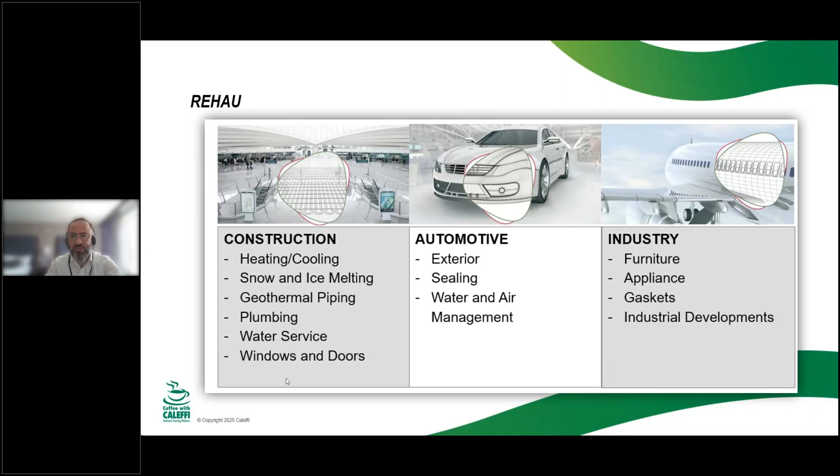But specifically today, we're going to talk about radiant systems and balancing. What is radiant technology? In the HVAC world, any system that provides more than 50% of the heat transfer to the room and the occupants through longwave radiation, we can define as radiant technology.

In our world, it's normally a network of pipe, which is either embedded in the floor, wall, or the ceiling. Based on my experience over the last 12 years, over 90% of the systems we work with are floor radiant systems, mostly radiant heating, or it could be radiant cooling as well.

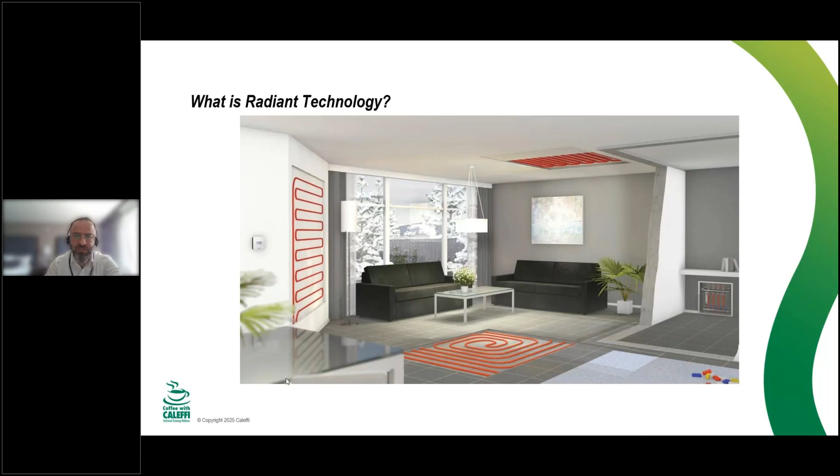The concept of radiant heating is we are sending warm water through a network of pipe, which is mostly embedded in the floor. There is a conduction heat transfer where the floor gets warm. This is very important - we are talking about a low temp system.

When it comes to the design consideration section we're going to talk about it, but the advantage of this system is we are talking about 100 to 120 degrees max supply water temperature. So this is considered a low temp and very efficient system.

By warming up that floor surface temperature to the point that it starts radiating towards the objects and surfaces in the room, based on Stefan-Boltzmann theory, any warmer object tends to radiate towards colder surfaces - that's the fact we take advantage of. Of course, some natural convection happens at the floor level, I'd say about 20 to 30%, but the majority of heat transfer to the other components in the room, or even occupants, happens through longwave radiation.

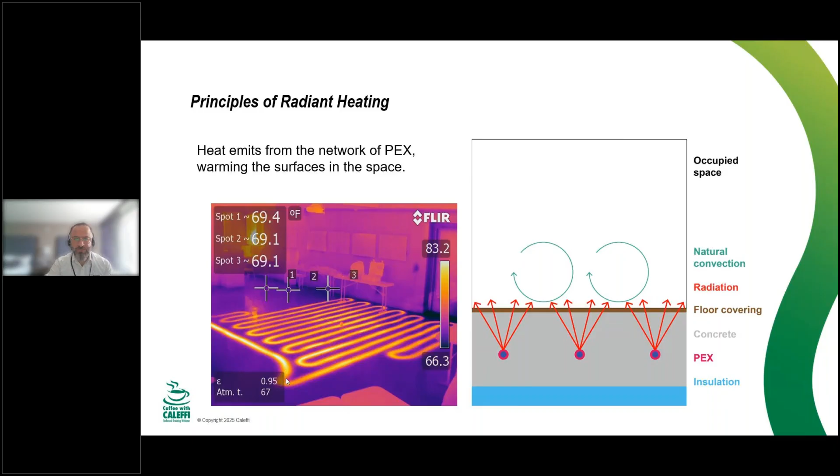The types of these radiant systems - we mostly see embedded surface systems, or ESS, where it's a unidirectional type of heat transfer. On one side of the slab, it's mostly insulated, so the heat transfer happens on only one side of it. This is, again, more than 90% of what we see in the industry.

We also have thermally activated building services or systems, aka TABS system. These are bidirectional, so you will see heat transfer on either side of the slab. The slab is exposed, so it will act as a floor system on one level, and it will act as a ceiling system on another level. We have some project samples on this on our website if you want to check it out at REHAU North America - very successful projects. It's a little bit complicated on the design side, but we can definitely help with that.

Also, we have the high performance ceiling panels. These are panels made from metal, and you have your tubing attached from the backside. Very common in Europe, it's in the baby steps in the North American market. But since it's out of our scope, we're going to be focused on the first system, that is ESS.

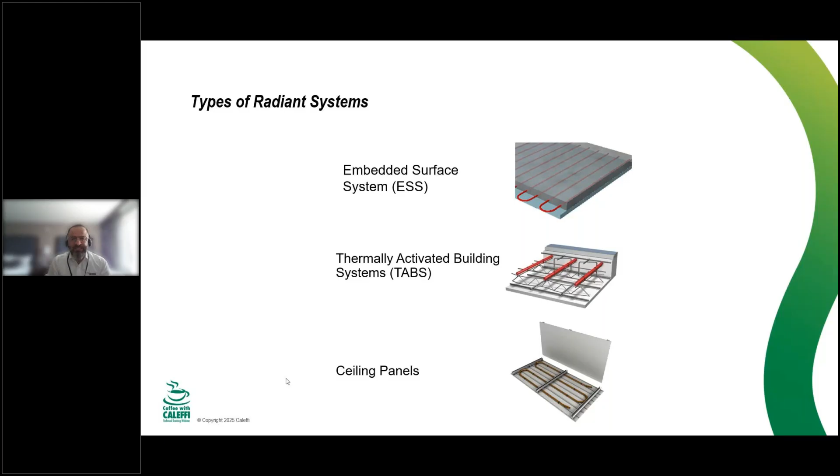This is where the contractors come and pour concrete, normally anywhere from 3 inch to 6, 7 inch, and we want to see at least 2 inches of concrete coverage in these systems over tubing to keep the integrity of the thermal mass. So for a structural slab, 2 inch above tubing is your magic number.

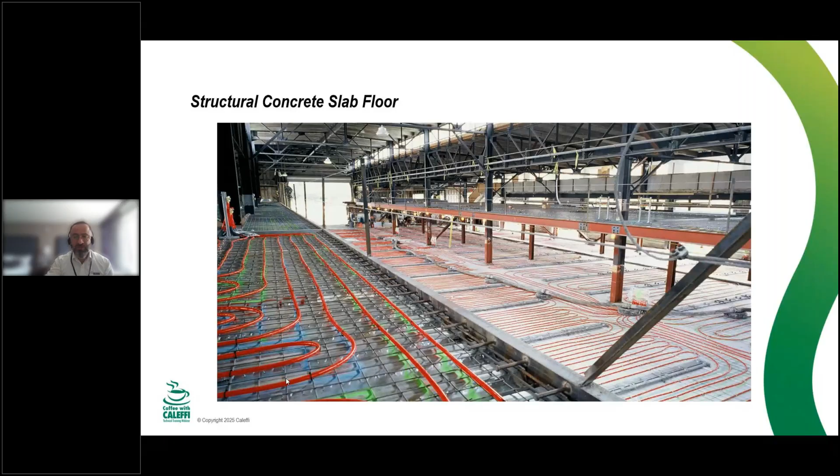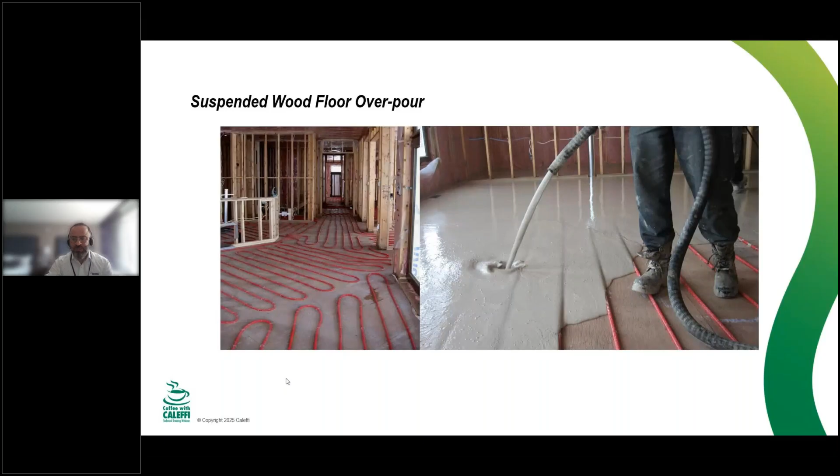Also, we have another wet system. This is also for a new build, which is called an overpour system. This is normally for like 4-story walk-ups or wood frame buildings, where you staple down your tubing over your plywood subfloor, and then you come and pour a 1.5 inch layer of concrete or gypcrete. In these cases, since these systems are non-structural, all you need is only 3/4 of an inch of gypcrete or concrete coverage above your tubing system.

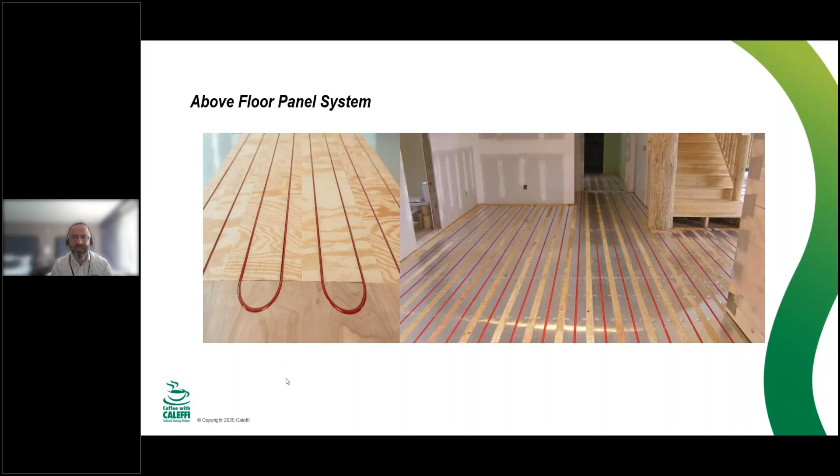Also, we have dry systems or panel systems. These are perfect for retrofit application. In the photo, you can see our RAUPANEL and RAUBOARD system, a great application developed by the REHAU engineering team. The photo on the right has the highest BTU output of any other panel system in the market. If you do 6 inches on center, you can get almost 30 BTUs per square foot using only 110 degrees supply water temperature.

This system can also be installed on the wall if by any reason you are short in floor space. Like for example, in some bathrooms, if they have multiple exterior walls and you're short on area because you have your bathtub and toilet and everything, you can use a portion of a wall using one of these radiant panels to provide more heat to the space.

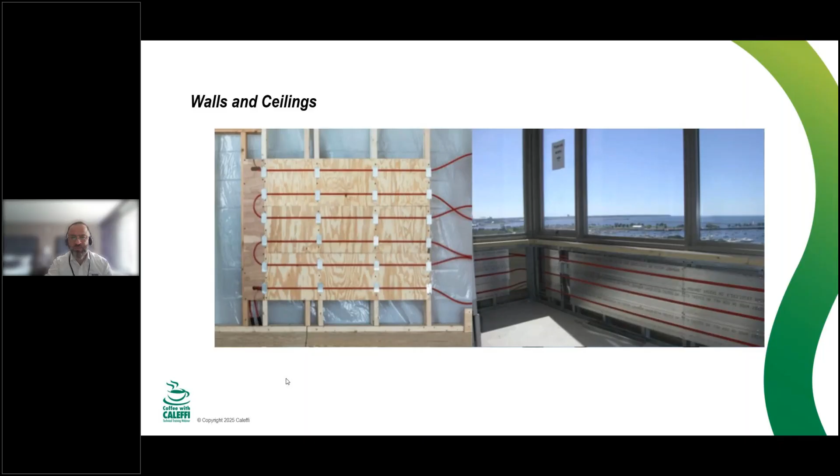So let me ask a question from all the audience here before we go to the design. Has anyone in this room designed or installed this system before? I think Max can have access to the answers.

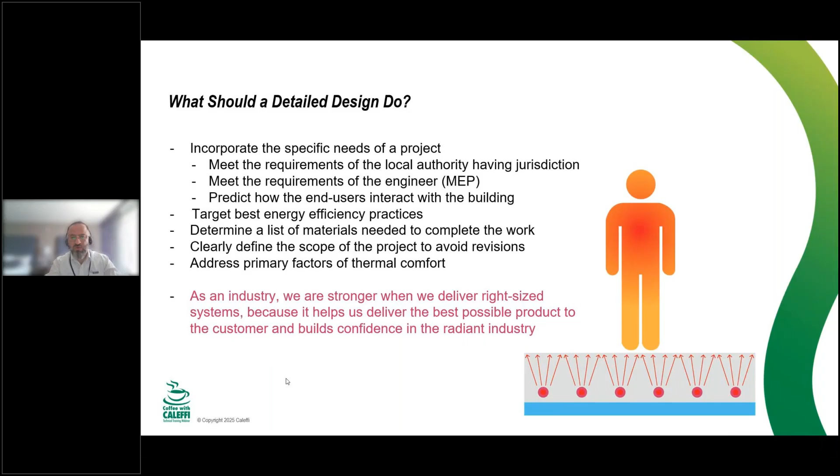That's actually a hydronic designer's job, to make sure you select the right system, sometimes by even upsizing a bit on the plastic pipe and saving a lot on the costly part of the system. So we would be more than happy to help you with that.

These steps that I'm going to talk about, we have a software for it. It's called LoopCAD, developed by a Canadian company called Avenir. It's a very nice application which does radiant heating, radiant cooling, and snow melt, and it has these formulas built into it. But I want to explain the fundamentals so you know what's happening. If anyone in the room has dealt with this app before and has questions, I'd be more than happy to discuss it.

Or if someone prefers doing a manual calculation, always, that would be fun too. So these are the steps. First of all, you need to do the heat loss of the space.

If it's a commercial project, in most cases you'll get the number from the engineer. The mechanical consultant team works on these numbers, and they size their heat source, which could be an electric boiler, gas-fired boiler, modcon boiler, or any type of heat source. That's the basis for the heat loss calculation.

And then on the radiant panel side, where you have it in the room, you want to define the unit heat load, which is technically the usable area. Then we calculate the floor temperature, the pipe size, the spacing. We have some best practices I'm going to go through. Then by knowing the water temperature, the flow rates, and the head losses, we get to the final steps, which is sizing the circulator, the expansion tank, and other components of the mechanical room.

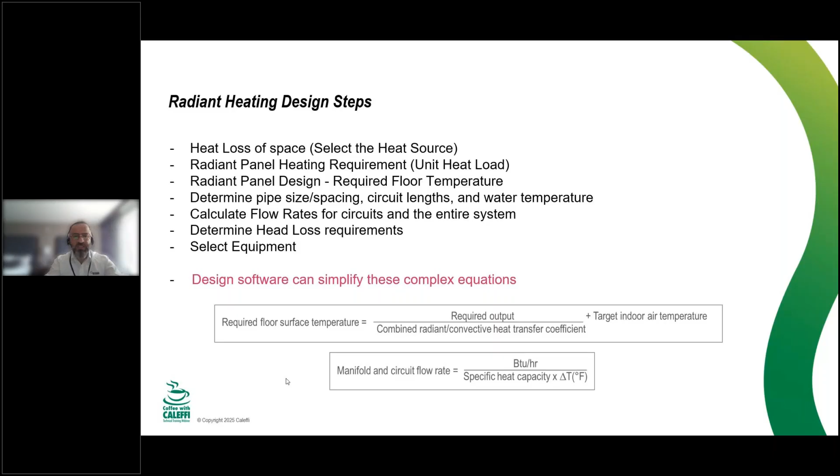These formulas, you can see in the next slide, are the three main ones I'm going to talk about. The first is the required floor temperature, which equals the radiant unit output divided by the heat transfer coefficient, plus the indoor design set point. The indoor design set point, normally for a radiant system, is based on ASHRAE 55 — somewhere between 68 and 72 degrees Fahrenheit.

In some areas we may get questions from mechanical engineers or owners wanting higher numbers. This is a different system than forced air — you don't want a higher indoor design set point because your surfaces are already warmer. That's based on various research that ASHRAE and other organizations like CBE did; they figured out 68 to 72 would be a good number.

Also, the heat transfer coefficient plays a very important role, because in heating mode you're taking advantage of natural heat transfer through convection, so you have a higher number. It's totally opposite for cooling. When you have a radiant heating system in the floor, your heat transfer coefficient is somewhere around 2, as opposed to if it's in the ceiling in heating mode.

Let me bring up an example. Imagine we have a 1,000 square foot project, and we calculated the heat loss as 30,000 BTU per hour. If you divide this by that number, it gives you 30 BTUs per hour per square foot, which is your unit load. Divide this by almost 2 as your heat transfer coefficient and add it to 70 degrees indoor design set point, and it gives you the floor temperature. If you get to a floor temperature of 85, it means you can compensate that heat loss.

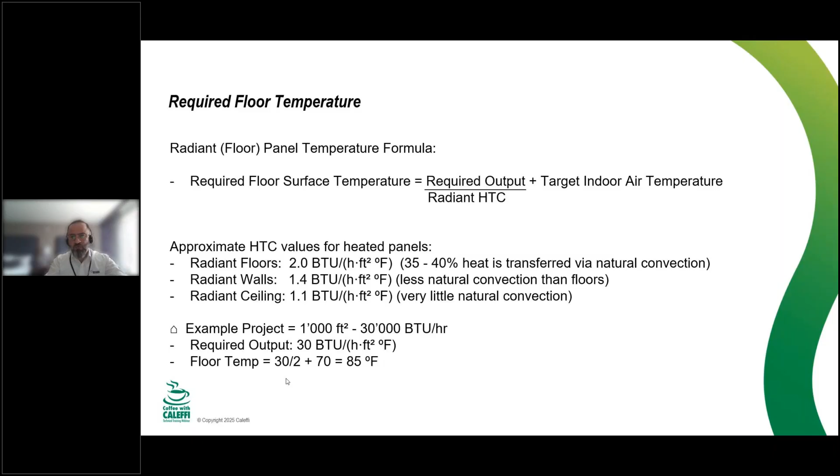So what's next? What water temperature do we need to bring the floor to that temperature, 85? That's calculated through this formula, which is a factor of the total R value above the tubing, like the concrete and floor covering, also the pipe spacing. As a rule of thumb, it would be somewhere between 1 to 1.5, and then you add it to the floor temperature.

In our example, if we want to consider something in between, you have 30 BTUs per hour per square foot. You multiply it by 1.3 and add it to the floor temperature of 85, you'll need somewhere between 124 to 125 degrees supply water temperature to make sure you're getting to that 85 degree floor temperature and then compensate the whole heat loss of the space.

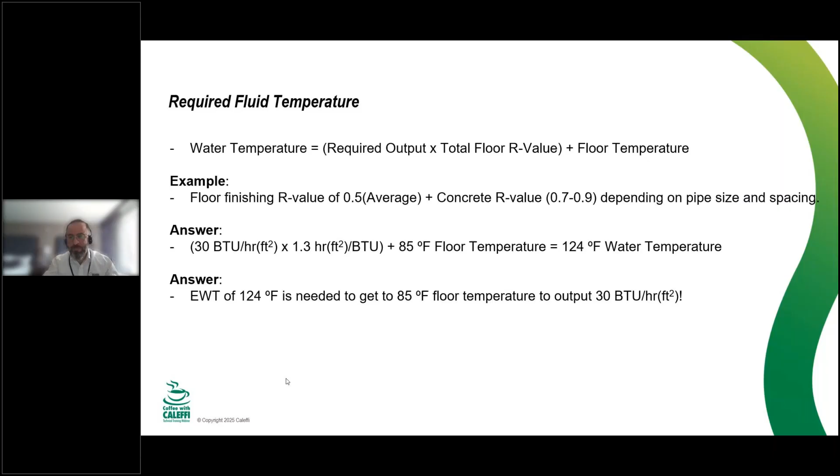Last but not least, the main formulas. This is the very famous hydronic formula to calculate the flow rate. You just divide the BTU per hour, or your heat load, by fluid density times 60 to convert the hour, and then the specific heat of the fluid, which for water you can round up. The regular delta T in the hydronic industry, especially radiant, is 20 degrees. So to make it easier to understand, I rounded up the whole denominator to 10,000. Your magic number is whatever BTU you have for your building, you just divide it by 10,000 if you're using 100% water.

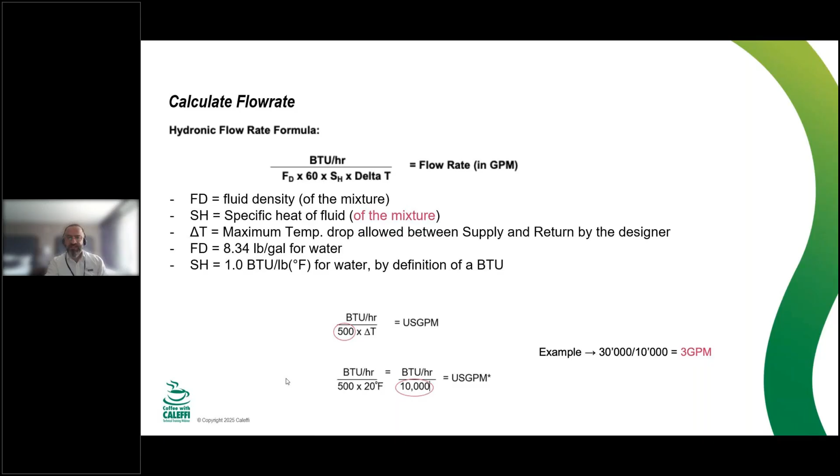Then you can tell how much GPM you need for the entire building. In our example, where we had 30,000 BTUs, you will need 3 GPM to send to the room to make sure you can address the heat loss. And then your next step is where you run your tubing to each room.

Radiant systems are very nice and zonable. Manifolds normally come from 1 station to 12 stations, which means you can serve rooms up to 12 rooms at the same time and control it.

Keep in mind, using the ProBalance manifolds, REHAU ProBalance manifold, you are able to adjust this loop GPM from 0 to 2. As an example, you can see in the photo, you have 2 rooms, similar square footage, but one has 2 exterior walls, meaning it has a higher heat loss. No problem, even if they have very similar loop length, you can just adjust it on the manifold and send 1 GPM to room A and 0.5 GPM to room B, and take care of the balancing very easily. Max is going to talk about it more.

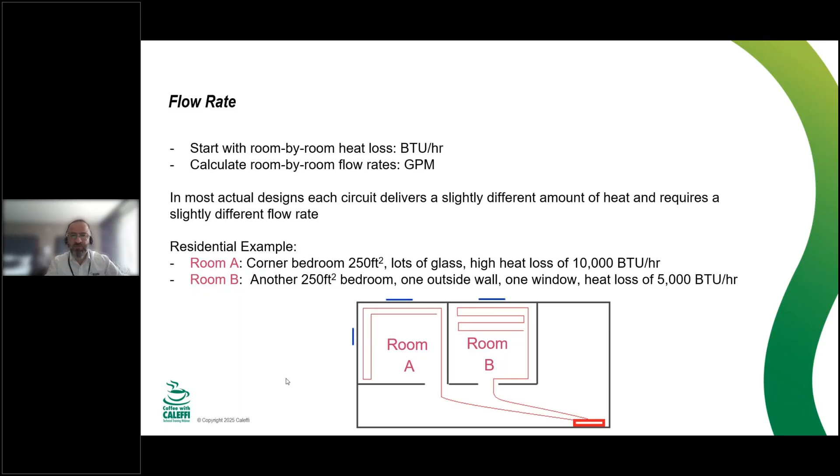After having the GPM, the next step would be calculating your head loss. There are several tools, as I said. LoopCAD does it as the first, easiest way for our team, the hydronic designers, or you can have access to an online head loss calculator.

You just enter your pipe size, your flow rate which we calculated in the previous slide, the fluid type, and the length of the pipe. Then fluid temperature plays a very important role. Then you can see how much pressure drop you're experiencing through your loop.

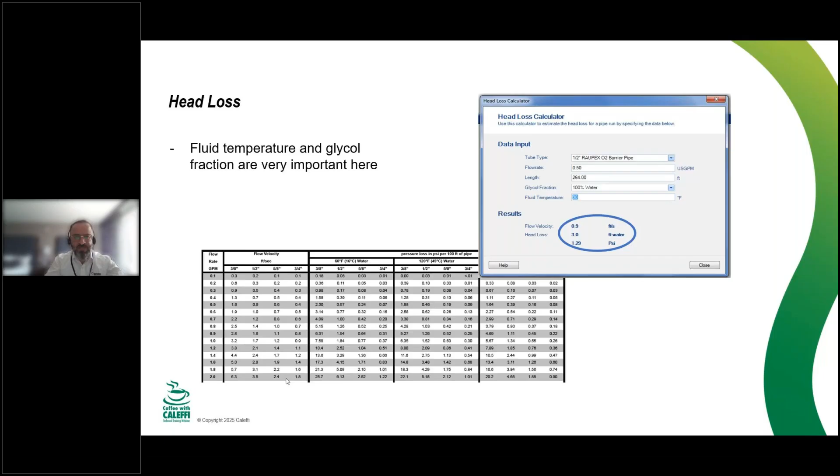Once you have the pressure drop and the GPM, that's your next step to go and size your pump. Depending on your pump manufacturer, you can always refer to their graphs. You can find that best efficient point of the pump, which is the side of the curve where your pump will operate at its maximum efficiency, and then pick it very easily.

I think this is from, they can find more information on idronics 16, right Max? Yeah, so this was a journal that we did on circulators. This goes back to 2015 when we published this. There's a lot more ECM technology now, but the concepts are the same.

You still want to find what that operating point is going to be to select a pump. I would say it's easier with ECM pumps because you have to be in a range. You're not going to end up at a specific point, and they can operate really efficiently within a larger area, which is helpful, but you still have to do the math. You still need to find the circulator with the calculations that Saeed described in the last couple slides. One really important thing is knowing the percentage of glycol, because that can really affect the whole equation.

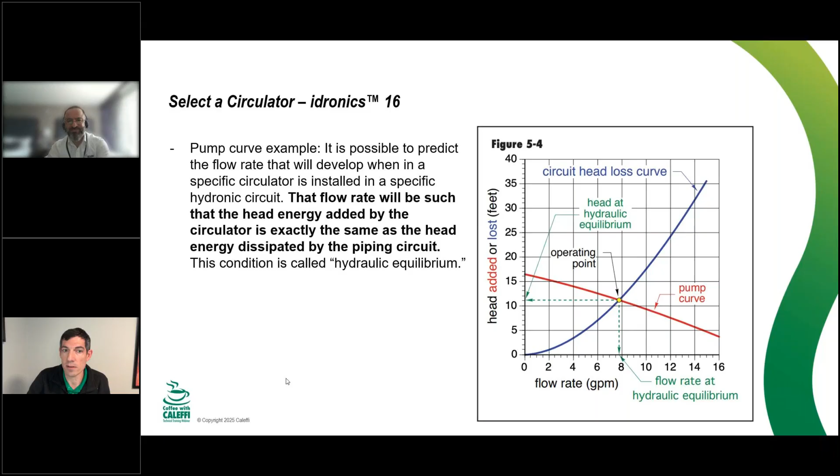Everything that you're putting into LoopCAD, if it turns out that it's not water, it's 50% glycol, you may have to relook at a couple different things there, specifically the pump sizing. So on the next slide, we'll talk a little bit about balancing options. What we wanted to do here is put together this building.

So I think zone 8 is a yoga room, so that might need a completely different temperature consideration than what we're doing in the walk-in freezer. In some cases, radiant is just used to keep the frost from ruining the concrete—that's completely different than what you'd be doing in a yoga room where people are already moving around and pretty warm. So we're going to need different flow rates for all of those potentially. That's one thing we have to look at.

So how would you—this is a question for anybody to write into the chat—how do you balance this building? We've got 9 zones that are pretty different. Can you use the same balancing valve here, or what's your strategy?

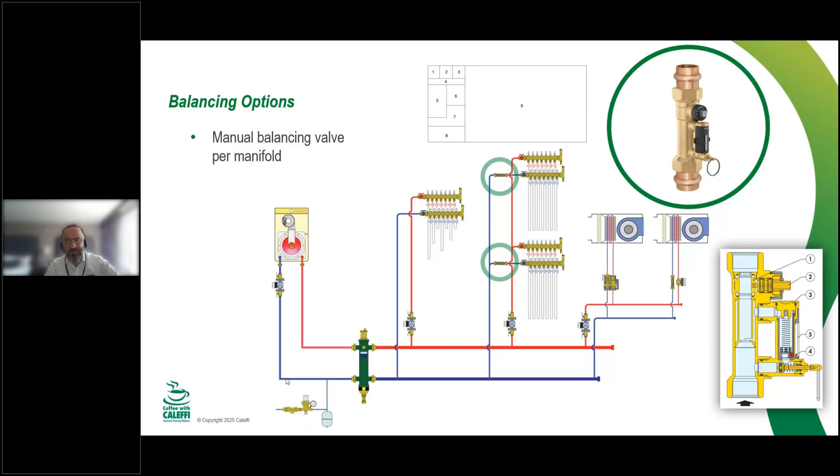Before we continue with the design considerations, here are some rules of thumb and best practices I'm going to mention. Of course, project by project, depending on the owner's needs and the mechanical consultant's needs, this can vary.

As I mentioned in the previous slides, we get a lot of questions about the comfort range. There are two ways to look at it. First, based on ASHRAE 55, which specifically addresses human comfort in buildings, they defined 6 primary factors for thermal comfort: metabolic rate, clothing insulation, air temperature inside the room, air speed on your skin, humidity of the air, and radiant temperature.

We talked about this - the radiant temperature is provided through longwave radiation. That's why having a radiant system in your application can help a lot for you to feel comfortable. If you want to address this with a radiant system, you want to make sure you follow the ranges that ASHRAE 55 recommends.

We also work with CBE, and I mentioned their name in part of my presentation. CBE, the Center for Built Environment, is a group of PhD and master's students out of University of California Berkeley, and they are focused on the highest level of research and studies on HVAC systems, especially ones dealing with high performance buildings and human comfort.

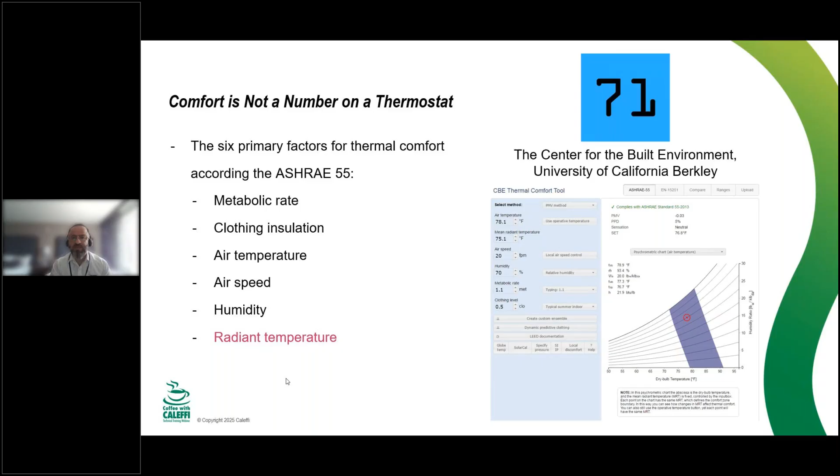They also have a nice tool called the RAD tool. It's a phase-one deliverable, let's say, radiant heating and cooling calculation. If we had a chance to talk further about radiant cooling systems, I'll definitely mention that RAD tool. Please go and check it out - CBE RAD tool.

But here are some rules of thumb, as mentioned, that I'm going to cover. When you're thinking of your slab configuration, first you need a layer of insulation where your tubing is either stapled to it, or on some projects they add a mesh layer and fasten the tubing to it. For this insulation layer, we always ask you to check with the local jurisdiction for the minimum requirement. But as a rule of thumb, we normally say R10 for a slab on grade, or it should be 5 times more than whatever you have above the tubing.

So let's say you have almost R 1.5 above your tubing, considering the concrete and floor finishing. We recommend having 5 times more insulation underneath, like R 7.5 at least, to make sure you're redirecting at least 80% of the heat towards the surface above, and only maybe up to 20% gets wasted as backloss. So it's very important to have that insulation.

I get this question a lot working with our clients - do we need insulation? The higher your insulation is, the more efficiently your system works, with less waste of energy, and a faster response of your radiant application.

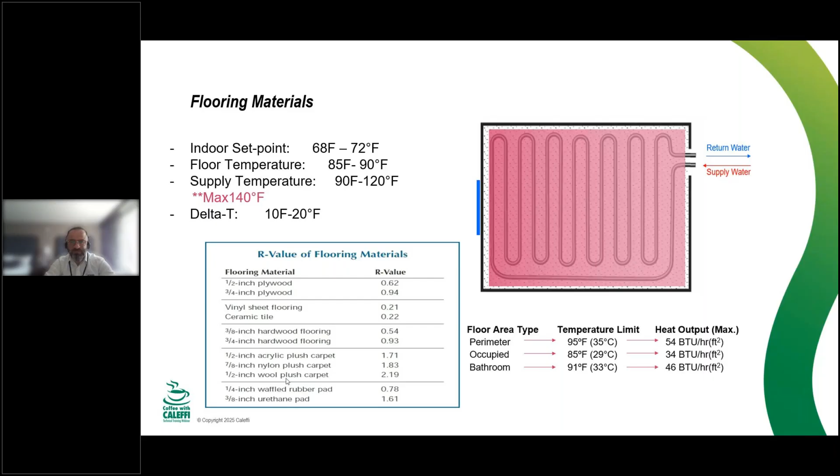And then we have a bunch of these questions. I'm wondering, Saeed, if you want to go back to the slide with our basic office and warehouse, this might be a good way to walk through a couple. So let's say one of the questions is about slab insulation. One of the things I know is important, can you model with LoopCAD or a design software if somebody said, well, I don't know if we need side insulation on the side of the slab here. What kind of difference could that make, to have insulation on the side of a slab versus just on the bottom?

For sure, you can model it with LoopCAD. And if you are not forcing the BTU, meaning you're letting LoopCAD do the heat loss calculation, the item it considers is always insulation, either in the wall or in the slab or in the edges, and that will have an impact on your back losses or directional losses. You can tweak that number and apply different R values and see the impact on your GPM. So if there is no R value on the side of the slab or even at the bottom, you will end up in a higher GPM to compensate for that. But if you go with good R values for those sides, you will end up in a lower GPM and reasonable head losses.

And you had a good question, or a good answer, for wood. So if you wanted to do hardwood floors somewhere, sometimes the underlying issue is that you could warp the floors, or you might start to smell the glue if you had 160 degree water going through them.

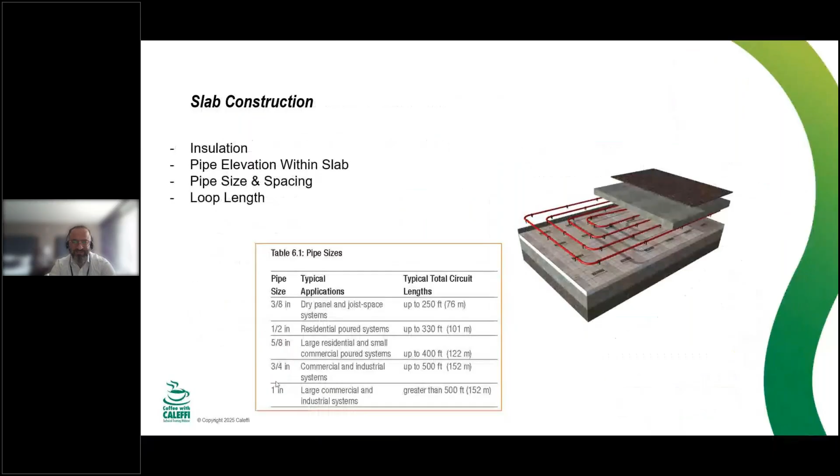But maybe in this example, let's go back to -- oh sorry, I asked you a question there. Okay, yeah, just wanted to go through the different R values of the floor, but you brought up a very good topic.

I would say hardwood floor finishing manufacturers are very sensitive about that. Some of them already have indicators -- you probably know this better than me -- that they put underneath the wood. If warranty claims come up, they rip the wood out and check that indicator. It changes color: for example, if it was originally blue and now turned red, it tells you the floor was exposed to higher temperatures than like 85 degrees, and your warranty would be void. That's why I emphasize having a floor surface temperature sensor, which you can hook up to your thermostat to set as a higher limit of floor temperature. If you have engineered wood or any floor finishing you want to keep safe, you can define that higher temperature limit on your floor and stay safe always.

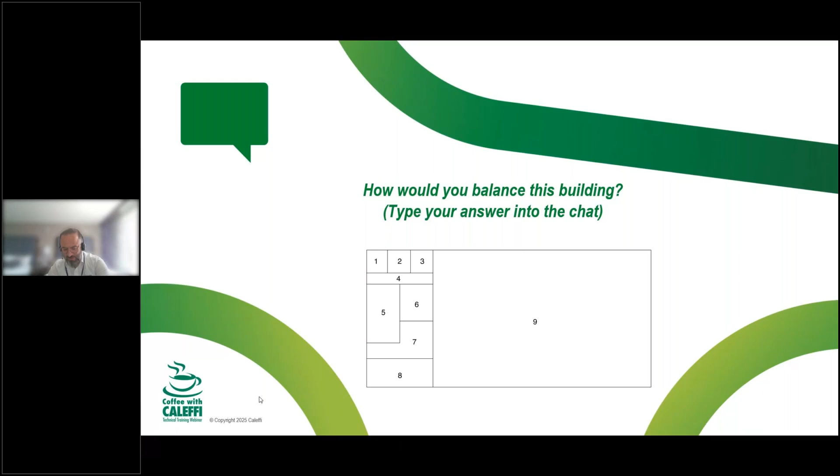And that was a question we had too -- how do you control these things? Your answer there was about wanting to know the air temperature of the space, but also the temperature of the slab. Do you want to cover where to put the floor sensor? That's always a really frequent question. Do you want to put it right next to the pipe, or where would you put a floor sensor if you had 12-inch on-center spacing, as an example?

That's a great question again, Max. First of all, we always recommend having this floor sensor inside a conduit, like a piece of PEX pipe even, because you can change it in the future if something happens. Then always place it in between the supply and return tubing -- if you're having 12-inch spacing, try to be at that very center line so it has a more accurate reading. That's the whole idea: don't be so close to the exterior unless you want to address the worst case scenario.

But you're right, picking a good spot for a floor sensor is very important. Most floor sensors in the market come with a certain amount of wiring, 6 to 10 feet. You can always add to this, but keep in mind, going with longer wires brings your reading accuracy down. So always keep that optimum distance from your thermostat.

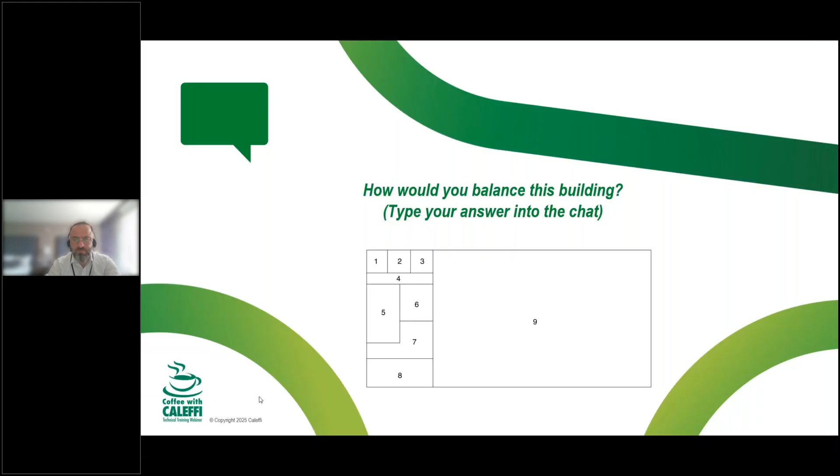And maybe we can talk about this in this building. So let's say we've got all these different types of rooms - was that one slide before that showed what they were? These, yeah. So let's say zone 9, that big warehouse, maybe as you mentioned, you go with 3/4 inch pipe and you've got wider spacing.

That's not going to react very quickly, and that's okay. You wouldn't turn on that slab at 6 in the morning and turn it off at 5 p.m. You're going to put that in cruise control, and you probably want that warehouse to be warm throughout the heating season. But that might be completely different from circuit number 8, that yoga room.

So what would you do if you wanted to do radiant in that zone still, but you wanted a little bit faster reaction time? Maybe you could put a little bit of a schedule, not 10 degrees Fahrenheit or anything like that, but warm it up for a specific time in the day. What would you use as a radiant installation method for something that you wanted a quicker response time?

That's a very good question. Again, for high thermal mass buildings, you don't have much of an option. If you have 2 inch or 3 inch of concrete coverage, you have to allow, if it's doing a startup for example. But we always recommend keeping it at idle mode and using programmable thermostats.

If you are expecting the occupants to come at 8, you always pre-program it into your thermostat so your system kicks off from idle mode to whatever it is designed for an hour earlier, just to be safe, for the smaller rooms like room zone number 8.

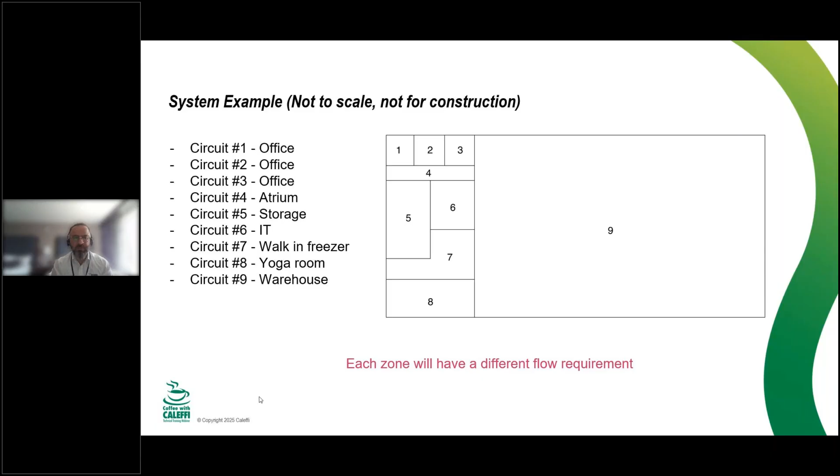That's where in many buildings you can see one bedroom is sweating hot, and the other bedroom the occupants open the window and enjoy the breeze. So if you have a good control strategy, if you consider these multiple zones, you're bringing your energy cost down. And again, our manifolds have the capacity of being controlled on each loop individually. You can have as many thermostats per building as you want, and connect it to one of those valve actuators on each loop, and make sure those zones are talking to each other, and you get proper temperature in each area.

Yeah, and I think if this building we're looking at here were a residential example, the control strategy with the floor sensor and a radiant thermostat that has a maximum floor temperature, you can also set a minimum floor temperature. So if zone six there was a bathroom, on the inside of the building with a bunch of warm zones around it, that thermostat might not call for heat very frequently, but then everybody's like, hey, why is the bathroom floor cold? That was kind of a requirement that I had for this house or whatever. You can actually set that as a minimum temperature too, so it's always going to keep the floor warm enough.

You don't want to do that in all of the zones, but that might be important in a bathroom specifically, that still works with that control strategy with the radiant thermostat. Great point, Max. I've had clients who said no matter if it's summer or winter, my grandma enjoys the warmer floor. So even in shoulder seasons or part of summer, they supply a lower, warmer water temperature to make sure they get a bit of warmth because she was sensitive to a cold surface. So setting a lower limit is always a good option too.

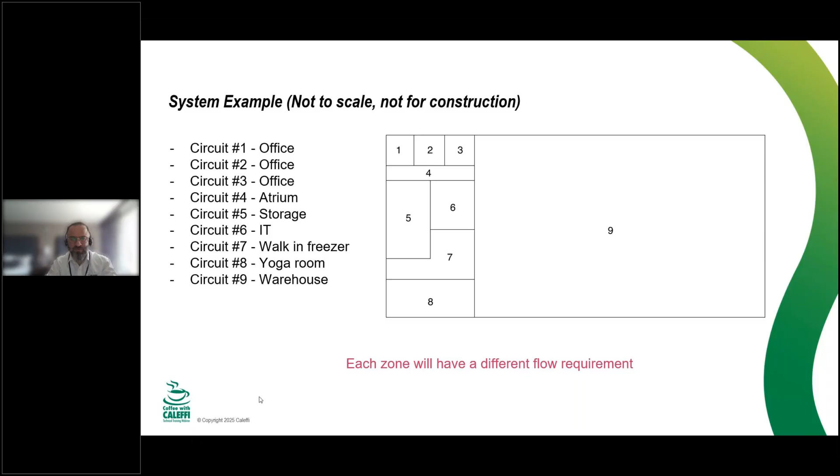And then I've got something we could try if you're up for it, Saeed, since you mentioned the radiant thermal comfort tool, the CBE calculator. If I switch over and take the screen, could you walk me through some of the parameter changes to make there? Sure, that was related to a couple questions, and I've got it pulled up here. I'm going to make myself the presenter and show the screen for people who want to stay on. We're just past the top of the hour, but I think this ties together a lot of what you've said and is definitely helpful for the design.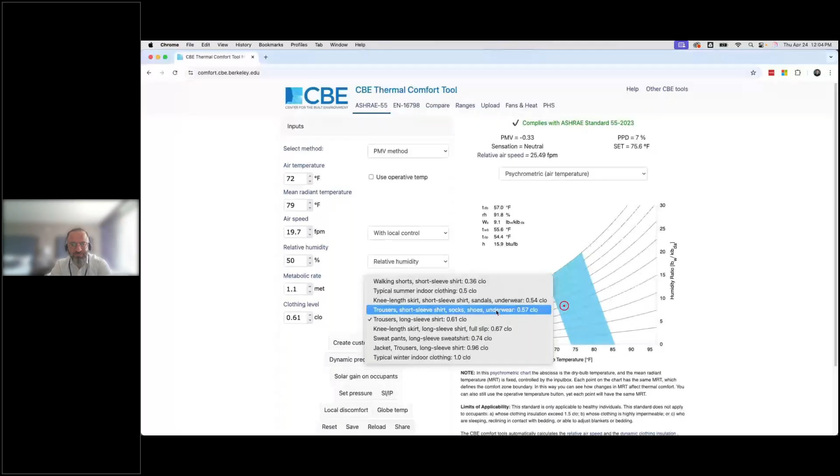Again, a lot of the calculations made for clothing level back in the earlier ASHRAE days were assuming it was just a man wearing a suit at work. If you were in a boardroom, you were going to be a man wearing a suit, and that's very much not the case anymore. So that's something you can model, that the average clothing is going to be a different variable than in that scenario where everybody was assumed to have a higher metabolic rate and be wearing a suit or something like that.

So that's just a very cool tool that I like to play around with, and it also gives you more confidence, which spills into the other conversation we mentioned at the beginning about radiant cooling. This is how you figure out that if we can reduce the mean radiant temperature in this room, we really don't need to get that air temperature so cold. So the temperature you see on a thermostat—there are some cases where people new to radiant, it's almost like you should cover that up with painter's tape and adjust the temperature up and down to see where you're comfortable, because you might be surprised: if you've grown up with forced air, you think you want the air temperature in heating really hot, and you just don't need it if the floor is already warm.

That lets you split the adjustments here. So that's why I really like that CBE tool, and thanks to you and the REHAU team for working on that with the group of experts over the years too. I think it's a very valuable way to see where you're going to fall out of compliance of the ASHRAE standard 55 for comfort, because then we don't win. Even if it's very energy efficient, if you're going to be too cold or hot, we're in bad shape there. We're happy to be part of these tool developments.

Anyone in the room still seeing this, feel free to check out their radiation tool, or RAD tool. It's a good tool to explore your radiant cooling options if you guys are interested. Hoping maybe sometime in the near future, with my friend Max, we could walk you through those slides as well. I'll bring that one over so you can see a grab of the rad tool there too. Very useful to give designers and installers more confidence that this would work, and this is a good way to do it.

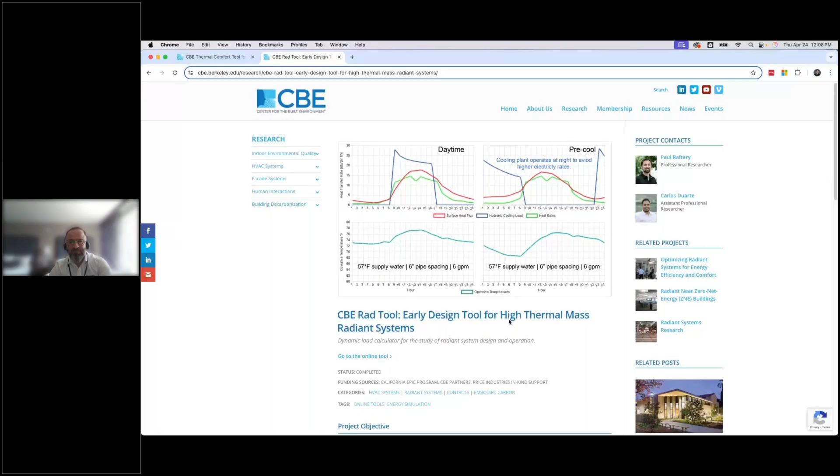Yeah, and that's important too, that we're talking about a building that has an envelope, you're not just exposed to the great outdoors. It's not so much a consideration of the local humidity levels outside in Salt Lake City versus New Orleans or something like that - you need a structure where you're able to control the humidity levels, but that's going to be code compliant anyway. If it's a new construction building, you should have those controls, or it's probably not going to be up to what we're supposed to be doing with new construction anyway. That really sets you up with ASHRAE standard 55 and 62.1 for the humidity control. Essentially, those are the boundaries that are already pre-existing that set you up for success there.

Except if it's an area with a humidity spike, like all of a sudden you get hot humid air - those are the risky points of the system. And as you mentioned, if you are avoiding areas like bathrooms with showers, or your building envelope is tight enough, you're not dealing with great risks of condensation in your project.

Well, I think that covers the most frequently asked questions we got in the chat there. There are a few others that we'll respond to after the fact that look a little more project specific. I'll stop there and thank you, Saeed, for joining us today. This was great and we got a lot of engagement with this topic. We'll look to do another maybe radiant cooling revisited topic at some point soon.